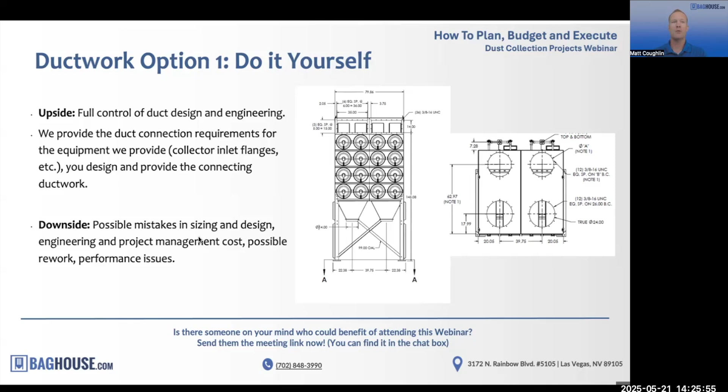So go ahead and go to the next slide there, Andy. Option two, let us do it. As I said, we have the experience to do the ductwork layout and design. This is a service that we offer essentially as part of our quoting process. So there's no cost, unlike if you're going to run your project and do a pre-bid evaluation and engineering, you're going to hire a third party to go lay out the facility and hand over the ductwork to us. You're going to have to incur that expense.

But our service is basically, tell us essentially what you need. We will give you 3D model layouts, rapidly produce the duct design, and then confirm all the sizing, airflow, velocity requirements, static pressure, everything you need and that we need to correctly spec out your equipment and make sure that the system is set up for your needs.

So there's really not a downside. It's a service that we offer that both helps us, because it ensures that your system at the end of the day is going to function as intended, which is what everybody wants, and it helps you because you are essentially getting that service for free. And there's a few other benefits that we can offer as a part of that. So go to the next slide, Andy.

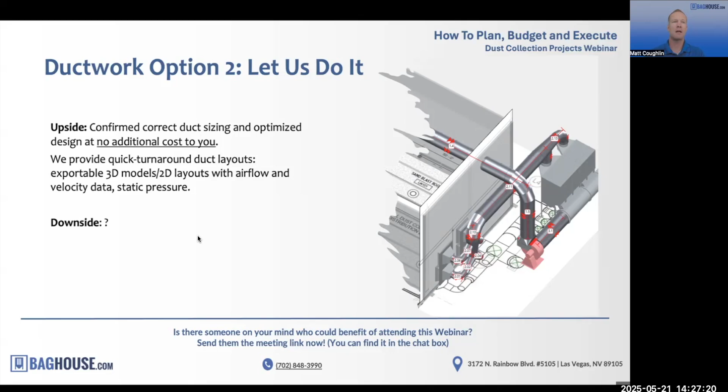So how does this work? Basically, we need a few inputs from you. We need to know a general layout of your shop or your process that you're going to be installing dust collection in. So quantity and size of pickups, where they're going to go, the type of equipment, so we can design the hoods if required. If we're talking about a conveyor belt or a milling machine, whatever it is, we have our standards. We have the Industrial Hygienist Guide and other standards that guide how to design the correct size and configuration of hoods and pickups.

From there, we do our calculations and calculate the required velocity through the ductwork and size everything to match. We've done this with basically napkin sketches, very rudimentary drawings from the customer, which we can rapidly turn into a model with all of the duct sizing calculations and tables that you can then review and we can change pretty quickly.

When needed. So we need from you some kind of a layout of where your pickups go, a little info about the building, so how we're going to be hanging the ductwork, building rafter heights, stuff like that, and some photos where necessary. So it doesn't take a lot for us to generate a really quick budgetary quote along with the engineering layout files that you can then take and review with your team.

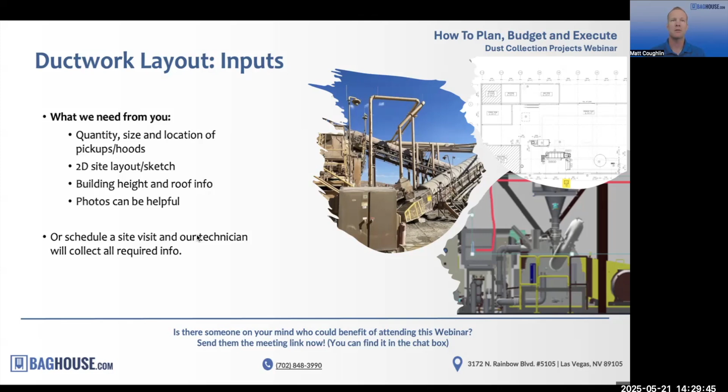Next slide, Andy. So what does this look like? What do you actually get as part of this process? And as I mentioned, this can be part of our quoting process. So if Dominick is quoting a large dust collection project, greenfield, new facility, we will have the equipment specs and quote, along with a ductwork layout and quotation, bill of materials to go along with that.

So what you get is a 3D model, which can be exported in several different formats, STL, STEP file. So if you have a big, complicated Autodesk 3D model of your whole facility and you want to drop the ductwork in there to make sure that everything fits right, we can export that quite quickly.

We'll give you the complete bill of materials. So that'll include all the info you need to evaluate the ductwork, the gauges and sizes and types of ductwork, all the hardware, hangers, everything essentially that will ship along with your ductwork package. You can review that down to the nut and bolt.

Various formats of 2D duct layout we can send, from very simple, just for communication, to exportable format. If your general contractor has very specific format requirements, for example, for their mechanical drawings, and they want that duct layout in their specific format, we can export it out of our system quite quickly. They can drop it in there and do whatever they want with it and make it match whatever format is needed. Or we can also generate 2D prints to whatever format requirements you want.